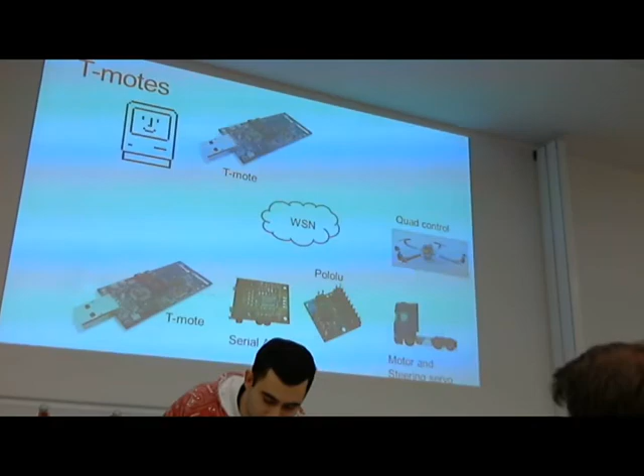So now we're going to hear Bashar talk a little bit about the wireless communication, the T-motes. Yes. Okay, so I'm going to keep the presentation about these very brief. It's basically the one you see up there. So what we've done is we're using the code that is already on the KTH repository, so we haven't really modified that code, and it works well.

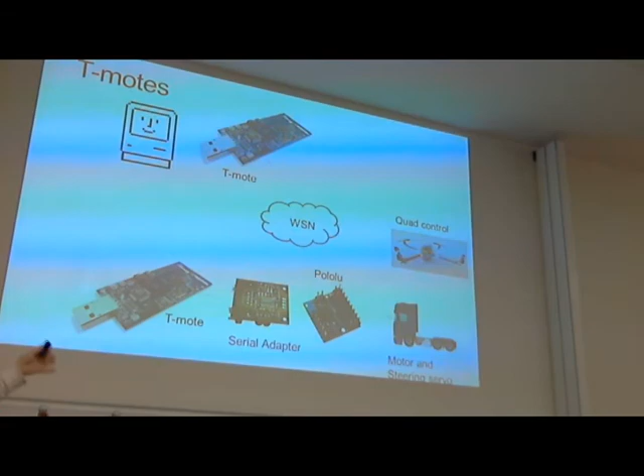So on the computer we use the LabVIEW application to send commands to the trucks or to the quadricopter. So what happens is that we have a serial forwarding server that takes the message from LabVIEW, forwards it to the T-mote. The T-mote then wirelessly sends the message to the T-mote on the truck or on the quadricopter.

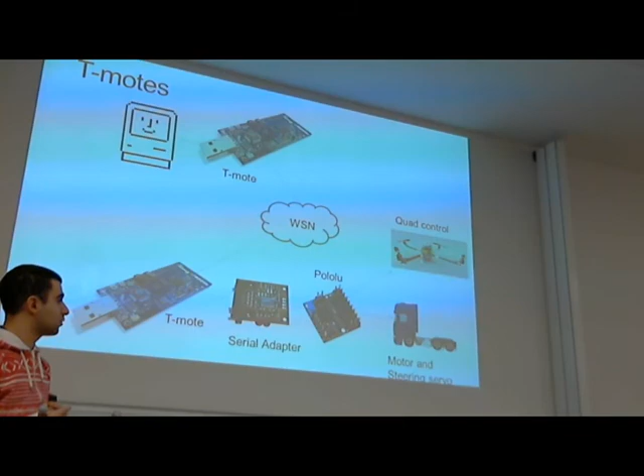And then what happens is that the message is forwarded to the serial adapter and then forwarded to the Pololu board, which gives a pulse width modulated signal, for instance with the trucks, to the servo controller and to the motor servo. So that's basically what happens, and that's basically what you need to know to understand later on when you see the trucks in action. Yeah, that's all.

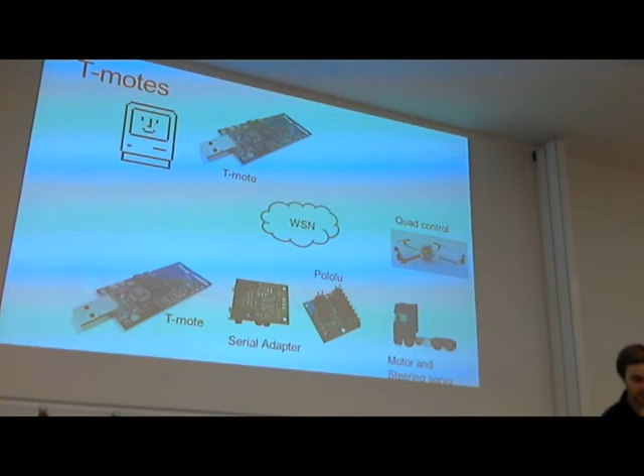Thank you. Then we're going to have Sebastian Pardo talk about the motion capturing system. Yeah. So we use a motion capturing system as mentioned, from the company Qualisys. This is basically 4 infrared cameras which look at the scene from different positions. And then we place on the objects, you can see them here, these little balls, they're reflective markers. So they reflect infrared light very well.

So basically what the camera sees is little dots. And because we calibrate the system and there's all kind of nice algorithms, they match these dots and they can recalculate the 3D position. At the moment we use a test setup with 4 cameras. KTH is about to buy a system with 12 cameras, if I'm not mistaken, which will arrive soon. And so we were sort of the first ones trying out the test setup provided by the company.

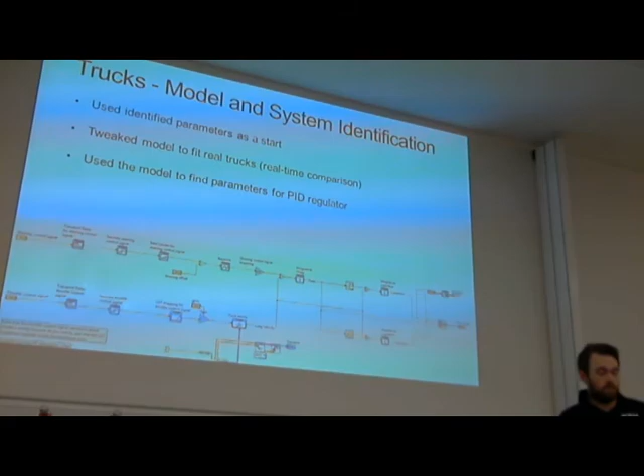And I also want to talk about how we implement the road system. So basically we take the road network on the floor and then we drove a truck around in the network, recording with mocap. And we took this data into MATLAB, where we created waypoints along this road, with the feature that every waypoint has a local coordinate system, with the x-axis pointing towards the next waypoint in the system, so that we can basically prolong the distance between them and make the truck follow that line in between them.

And we can also set the distance between waypoints and the deviation between different waypoints so that it fits our trucks. So the truck is basically following a straight line between 2 waypoints. And when it arrives at the waypoint it's aiming for, it changes to the next waypoint, and so on and so on.

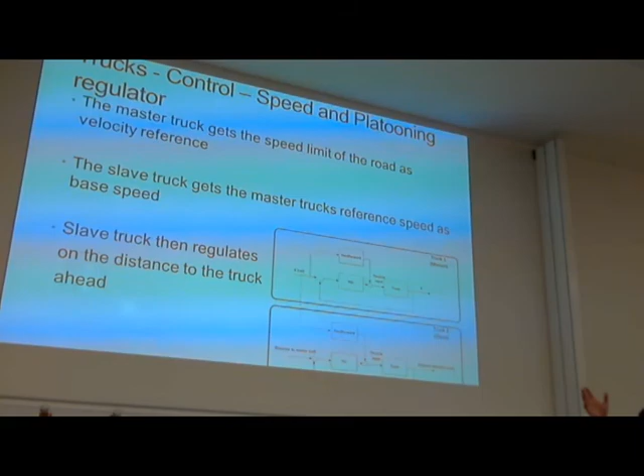So how did we do the control then? Well, this is a very simplified picture of the platooning regulation. The master truck, the truck in front, gets a speed limitation that it has to follow by the road. Bashar will talk about that later. And it tries to regulate itself to keep this speed.

The slave truck, however, the second truck, actually receives the velocity of the first truck, the reference velocity, as a feed forward. So it keeps the basic distance between the 2 trucks. So you only make fine adjustments with the PID controller.

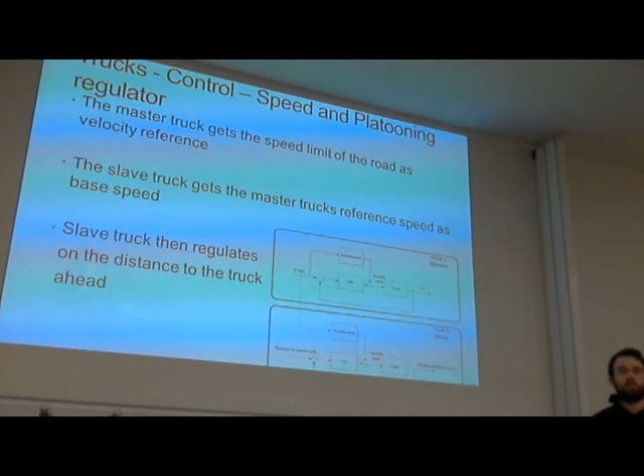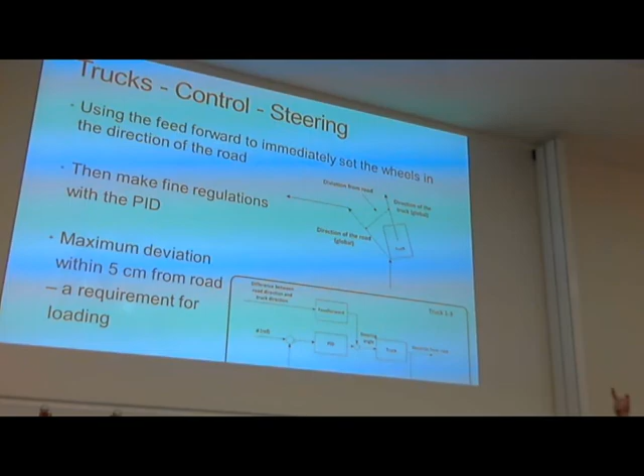So what we do is we feed forward the difference between the truck orientation and the road orientation, so that the truck automatically sets towards the next waypoint, and then the PID does the rest to make fine adjustments. And we managed to get the road following down to about plus or minus 5 centimeters deviation from the road.

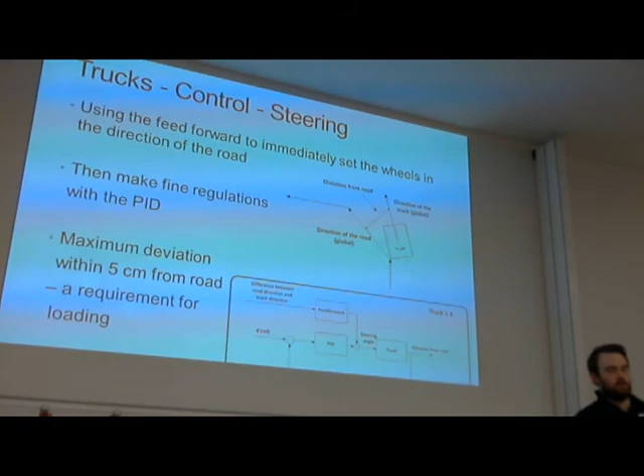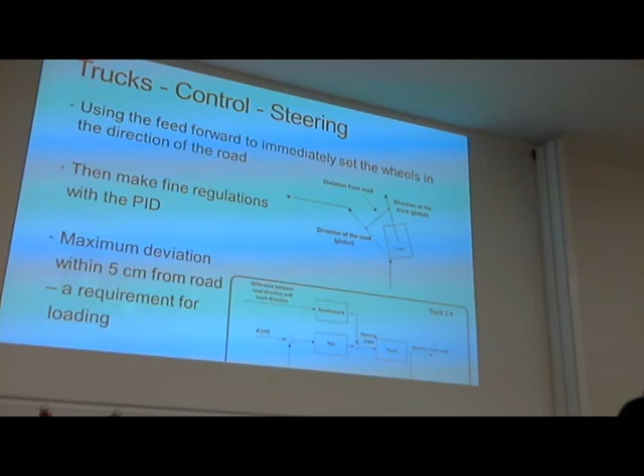And this was a requirement that we thought suited our solution, because we needed to load the truck later on. So this was the maximum deviation that we could really handle with the crane and so on, because then we're still on the road with trucks. And now I think Pasha will continue a bit more.

Yeah, I'll talk about the road network. So basically, the road network is composed of a series of road segments, and a road segment is similar to a road in the sense that you're able to drive on it. So every road segment is associated with properties. For instance, we have speed limits, which we need because the vehicle needs to slow down when it arrives at the crane, and it is allowed to go at a faster rate when it's not around the crane.

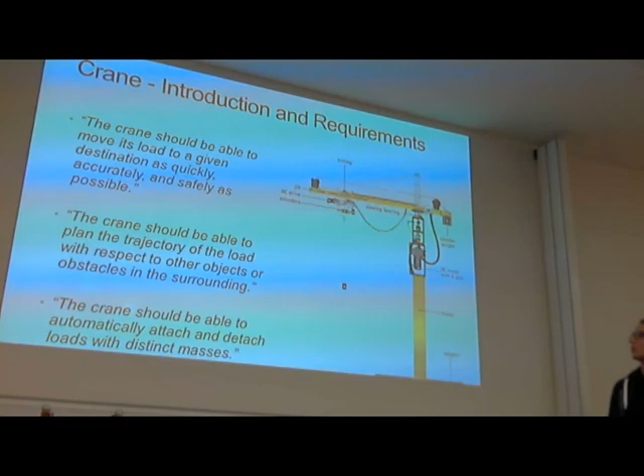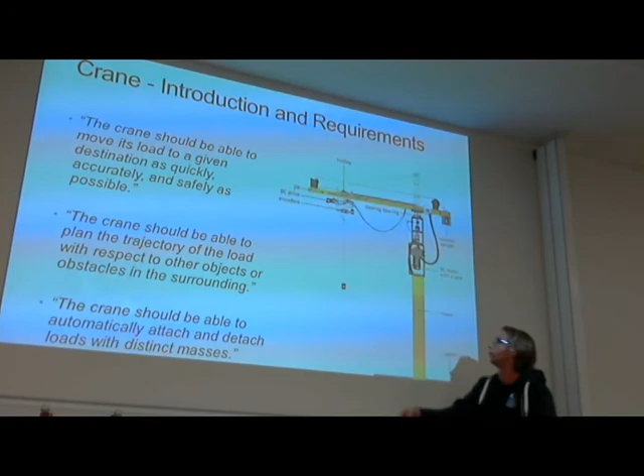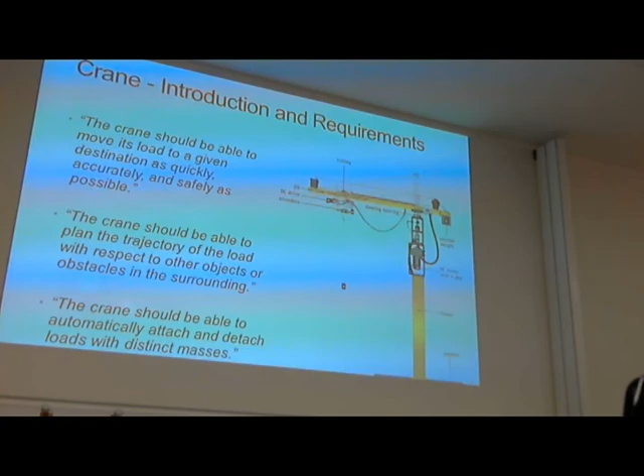Yes, so me and Kai have been working on the crane. It's basically a smaller version of a big tower crane, usually used in construction. The main parts are the tower, the jib, and the trolley, and this hook that we use to pick up loads. The crane can move the hook in any direction by rotating the jib around the tower, or lower or raise the hook, or move the trolley.

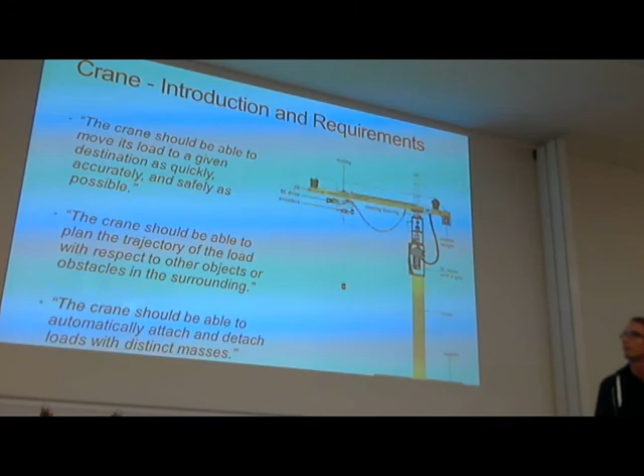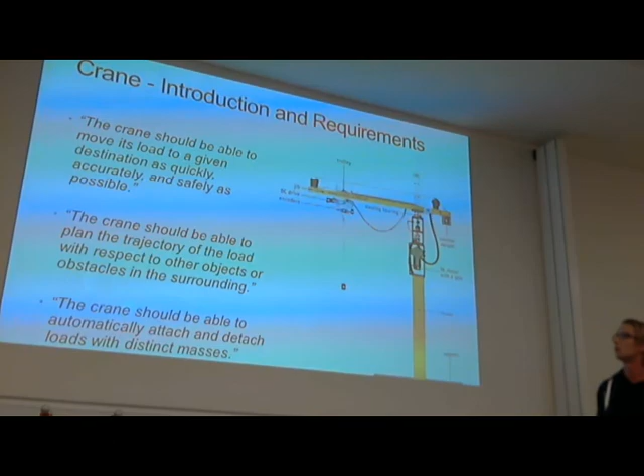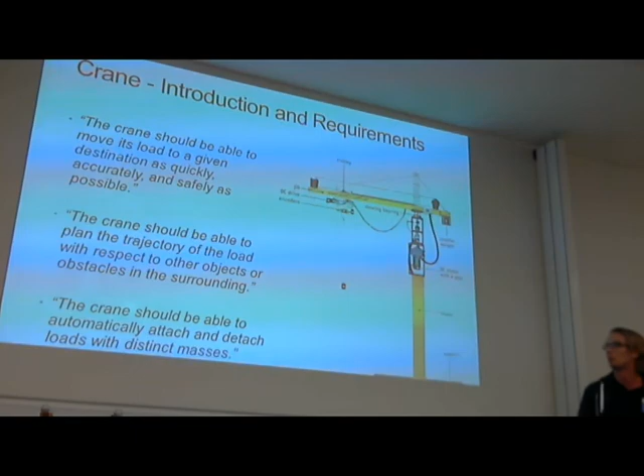When we started the project, we had the purchase order with some requirements on the crane. The first one was that the crane should be able to move its loads to a given destination as quickly, accurately, and safely as possible. And the second one, the crane should be able to plan the trajectory of the loads with respect to other objects or obstacles in the surroundings. For example, we need to avoid the trucks. We don't want to swing the loads into them.

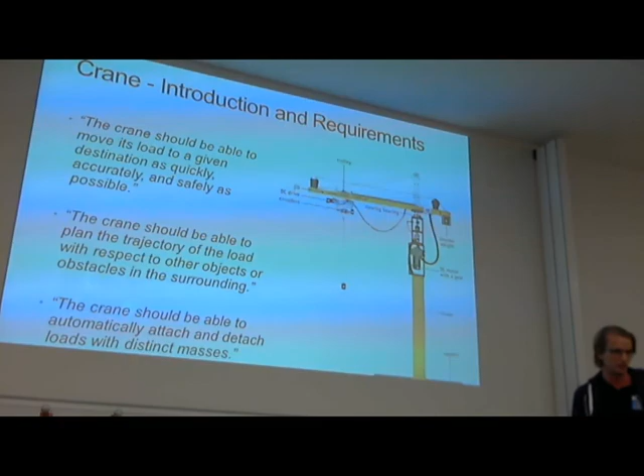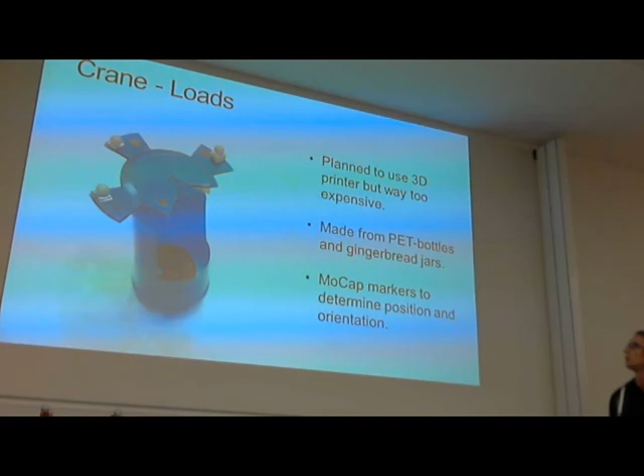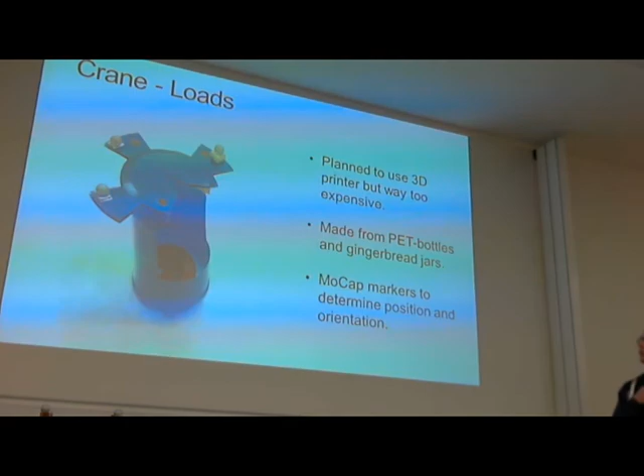And last, the crane should be able to automatically attach and detach loads with distinct masses. So these loads look like this. First, we planned to use the 3D printer, but the cost was way too expensive. So instead, we made loads by ourselves, and this one is made from a PET bottle and gingerbread jars. And on top of the load, you can see the mocap markers, with which we determine the position of the load and also the orientation, so we know in which direction we should go into it with the hook, and then we lift it.

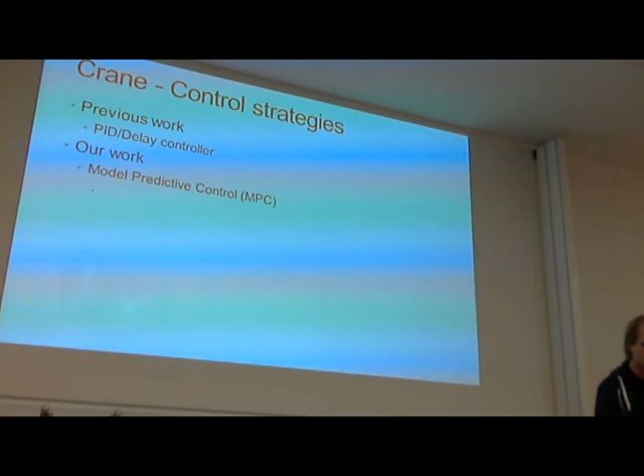Last year when they used the crane in the automatic control project, they used the PID, or delay controller. They call it a delay controller. But what we wanted to do is to use model predictive control, and one big difference between these two strategies is that to use model predictive control, you need a model. Kai will later explain how the model predictive control works.

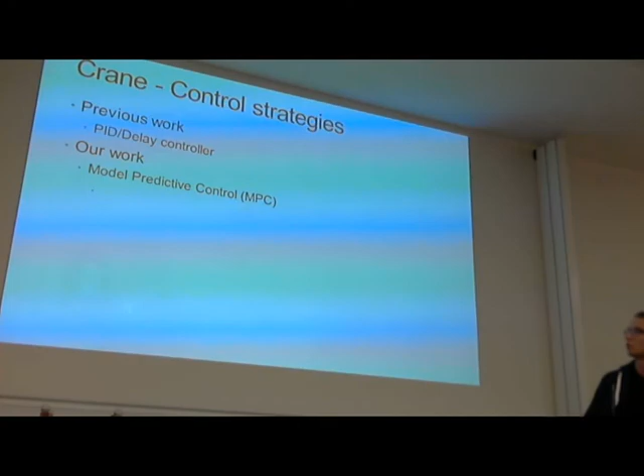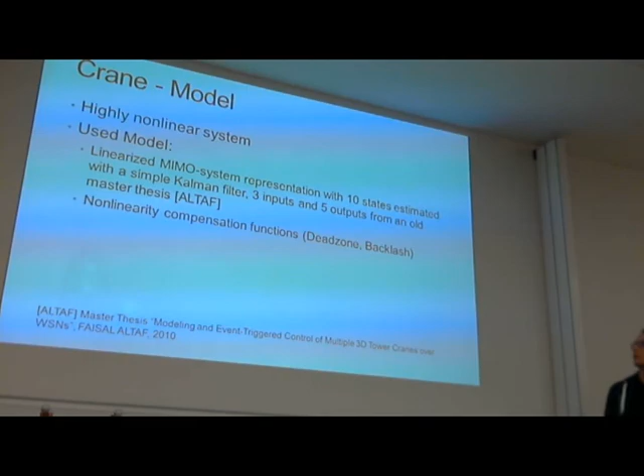So the crane is a highly non-linear system, and the model we use is linear. We got it from a master thesis, and we have 10 states that we estimate with a simple Kalman filter. And in the project they had last year, they constructed pre-compensation for the non-linearities. So basically we use a linear model and compensate for non-linearities. Examples of these non-linearities could be dead zones and backlash.

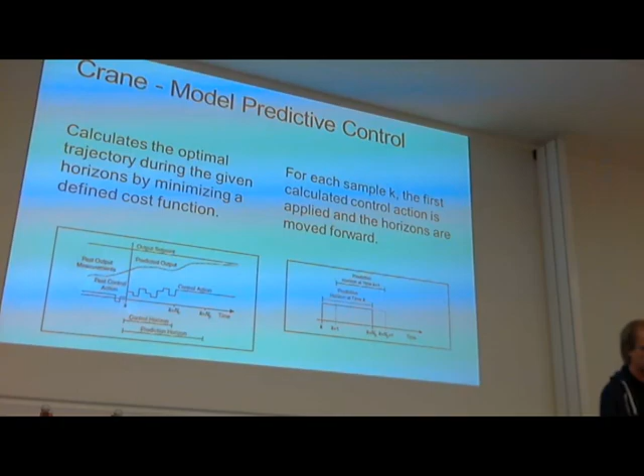Yes, as Jens mentioned, we use model predictive control. Since we don't know how familiar you are with this, I will give a brief introduction. Model predictive control is used mostly for sampled systems, and for every sample it runs an optimization, which means for a predefined horizon, or predefined samples in advance, it optimizes the trajectory, as you see here, and the first control action is then applied to the system, and the whole thing repeats with another optimization, and the first control action is taken for the next sample, and so on.

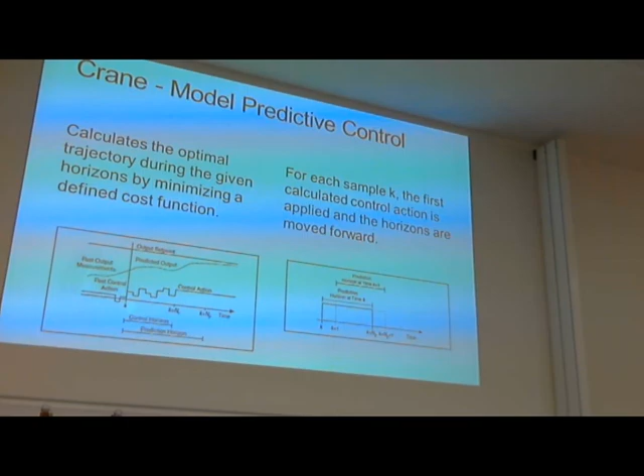The important thing therefore is to have very precise models, since for the optimization we use this model to predict its behavior and its trajectory. That's why we really needed a very precise model. And in the end, even though we use a completely linear model for our nonlinear system, we got quite nice behavior. We also defined the cost function for the optimization problem, and we could also define constraints for the system.

That enables us to run the crane around the working point at the borders of the working range, for example if the truck is quite far away from the tower crane and it needs to be loaded. And the MPC also enables quite fast position changes, since for a long enough horizon we get the more or less optimal trajectory for this position change, so we can just give it step references, and we don't need to define the complete trajectory, since the MPC takes care of that.

Then we also need to do other things, like getting the position of the trailer to know where to put the load. The problem there is that we don't measure the position of the trailer, only the position of the truck. So what we used is a discretized method from the so-called kinematic car. The only problem with it is that we don't know the initial position of the trailer, so we need to make a guess and then wait until it converges to the actual position.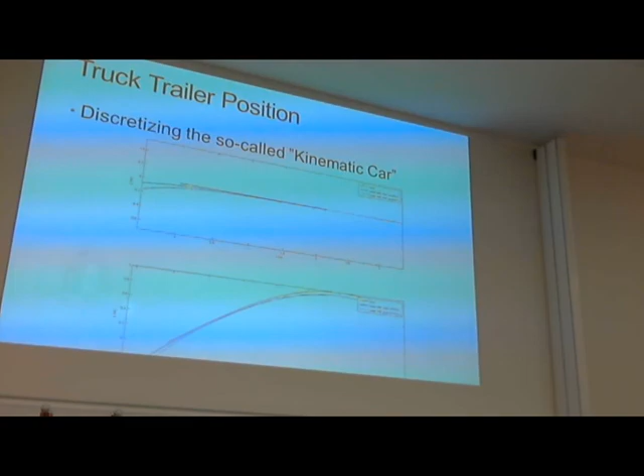And the highest level of our program runs a state machine, which coordinates the truck, the crane, and also takes care of messaging, like giving the request that the trucks are needed and the request for the trucks to go to specific positions. And also turn the control off and on, since otherwise the crane makes some unnice noises.

That's basically it. Okay, now we also have some future work to do, like improving the model, since we use a completely linear model at the moment. But what can be done is make a more precise non-linear model. Also improve the control to use updated MPC instead of a linear MPC, or even a bit more advanced, a non-linear model predictive control. Then we use an attach-detach mechanism without an actuator, but this can be changed to a magnetic actuator or a grabber.

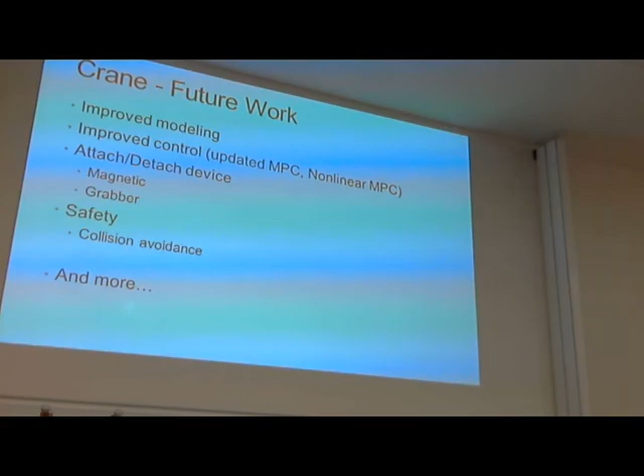Safety could be improved, since what we are doing at the moment is just moving the load to a height where we know there's no obstacle in the way, then changing the position and placing it. So constraints like other obstacles on the way could be taken into account as well. And of course, many other things. And now Christina and Fredrik will continue with quadricopters.

So here is our quadricopter. You can see it there as well. We use the quadricopter platform, and we started off by building a quadricopter from the start. We had to do some soldering and so on. This one uses an open source software called Arduino, and it has onboard stabilizing PID controllers. So we have not been working with the stabilizing controllers. We work with position controlling. And to communicate with it, we use the wireless Pololu connection that Bashar talked about before. So we emulate RC radio signals.

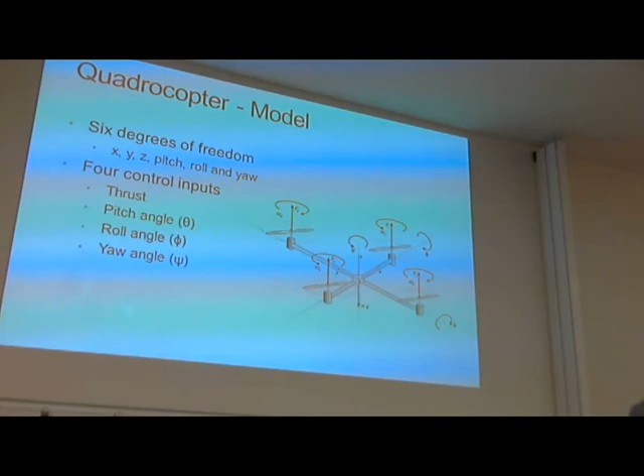And here is a model of the quadricopter. It has 6 degrees of freedom. So it's the position in X, Y, and Z, and also the angles, roll, pitch, and yaw. And we control it with 4 different inputs. It's the thrust, and then the angles again, pitch, roll, and yaw.

And we have some requirements on the quadricopter to be able to fulfill the final scenario that Ari talked about before. First of all, it needs to be stable at a given height and a given position. Then we need to be able to follow a trajectory, since we will follow the trucks around. We also need to avoid obstacles, and the obstacle we have is the crane. So we have a function for that Fredrik will talk about later, and we also need to be able to take off and land autonomously.

And to do this, we have a few control strategies. First of all, we use PID controllers. We have one for altitude, one for X position, Y position, and then one for yaw. We do some trajectory planning, because of the avoid crane function, so Fredrik will talk about that as well. And we have fixed procedures for takeoff and landing.

So for takeoff, first we arm the motors, and we do that by sending a specific servo signal for a few seconds, and then the motors can start. Then we quickly increase the throttle so it goes up a bit. Then we switch on the PID controller on altitude. Then it checks if it is at the reference height, and if it is, it can go and find the truck and follow it.

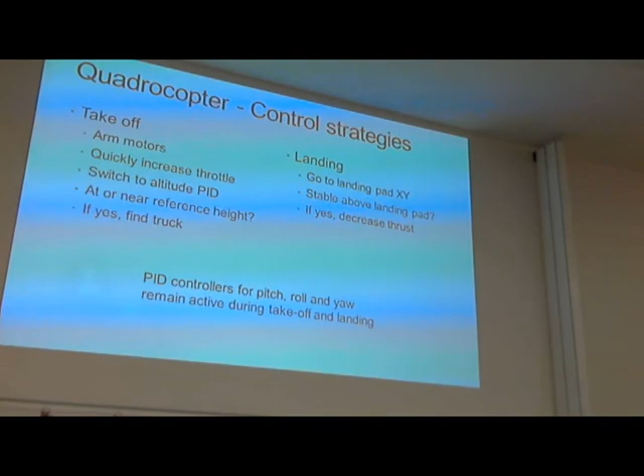To land, it first goes to the XY position of the landing pad, and then it checks if it is stable above the landing pad, and if it is, it decreases the throttle and lands. During these procedures, the other PID controllers for pitch, roll and yaw are active. And now Fredrik will talk about our safety measures.

So this quadricopter model we use, it's a quite powerful quadricopter, and they usually fly it outside. So we need some systems to handle safety requirements, because if we lose it from the motion capture system, then we can get some erratic behavior. So if we just lose the quadricopter momentarily, like for short periods of time, then we estimate its position from the previous data points, just to have something to keep working with.

But if we are lost for an extended amount of time, we pick a new reference which is towards the middle of the room, where we know that the motion capture has vision, and then the quadricopter will take that position and act on that reference. So we will hopefully move towards the room and then get the motion capture again. And then when we are within motion capturing range, we can pick the regular reference again, which would be following the truck.

And we also have to avoid certain areas in the room around the crane. So what we do is we define an area which we can't fly inside, a circle around the crane. And if our current reference goes inside this area, we pick a new reference just on the edge of the circle and follow that while the truck is running inside that area. And when it's outside, we can follow the truck again.